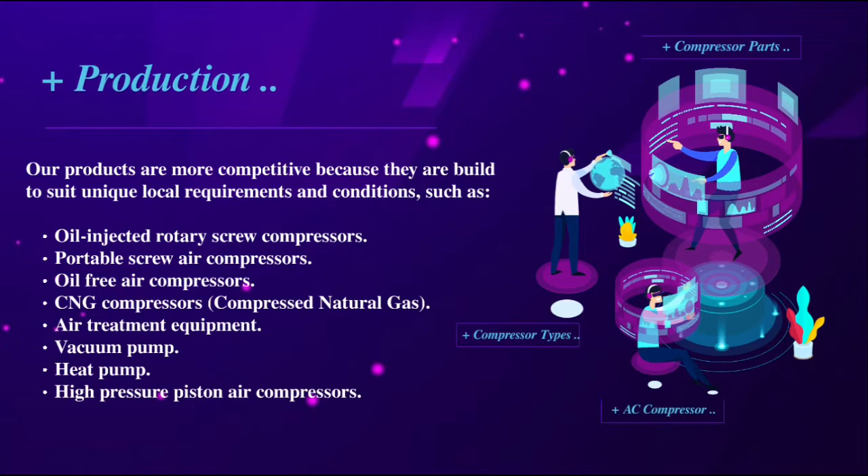Production: our products are more competitive because they are built to suit unique local requirements and conditions, such as oil-injected rotary screw, portable screw air compressors, oil-free air compressors, CNG compressors, air treatment equipment, vacuum and heat pump, and high-pressure piston air compressors. Compressor types: positive displacement, reciprocating, and rotary.

Reciprocating has single acting and double acting. Rotary has lobe, screw, and vane. The other type of compressors are dynamic, which includes centrifugal and axial.

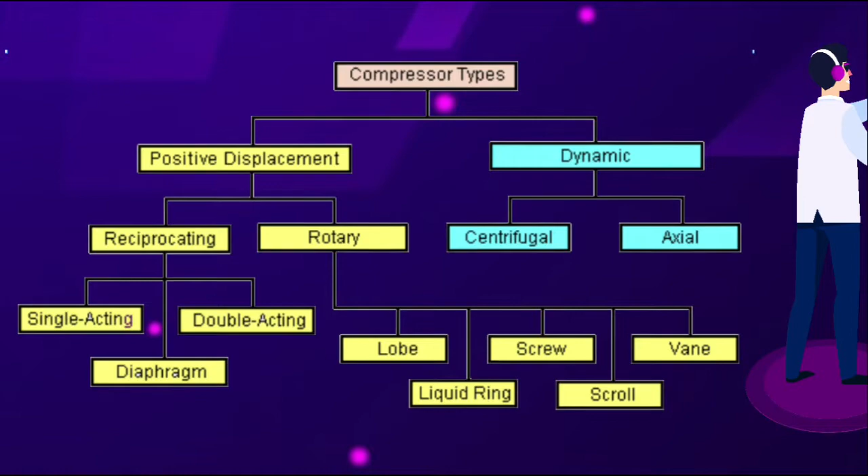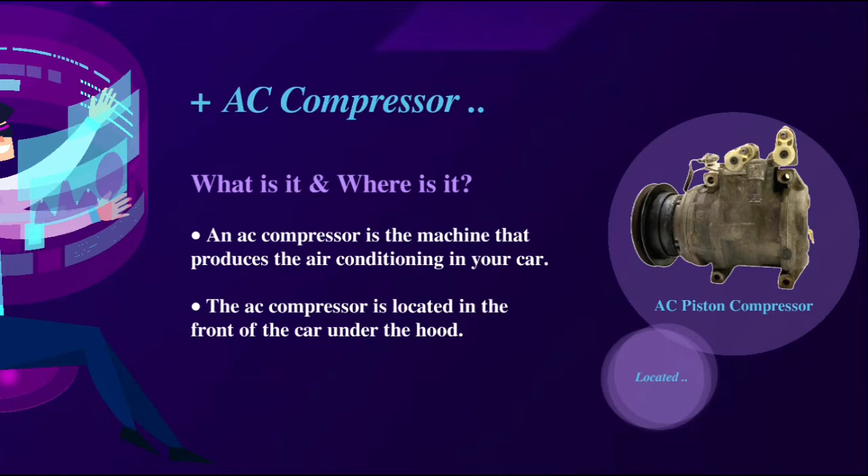AC compressor: what and where is it? An AC compressor is the machine that produces the air conditioning in your car. The AC compressor is located in the front of the car, under the hood.

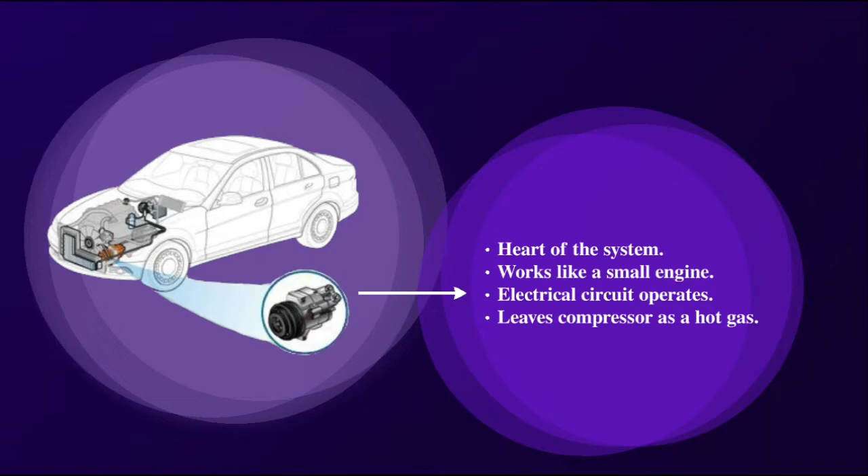AC piston compressor: the heart of the system. It works like a small engine. Operated by an electrical circuit, it leaves the compressor as a hot gas.

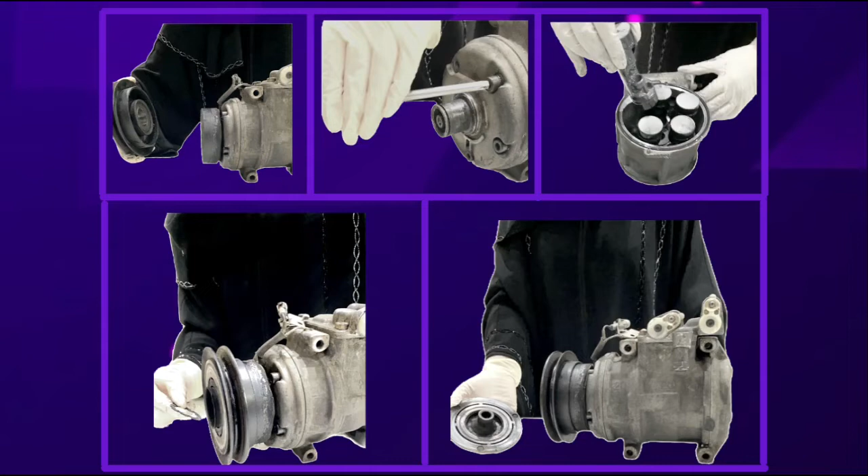AC compressor parts: we were able to remove the electromagnetic clutch. Then we removed the pulley using a hammer. Then we were able to remove the screws using screwdrivers. Then the pistons are shown in the last picture, and the next video would take you through it.

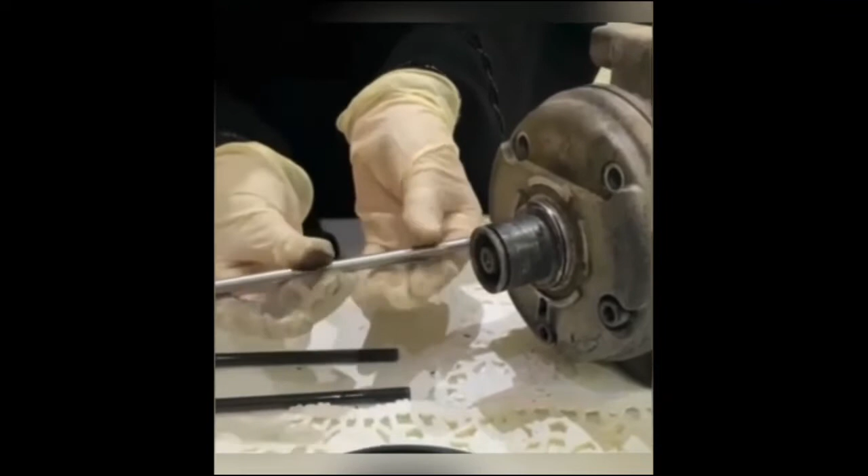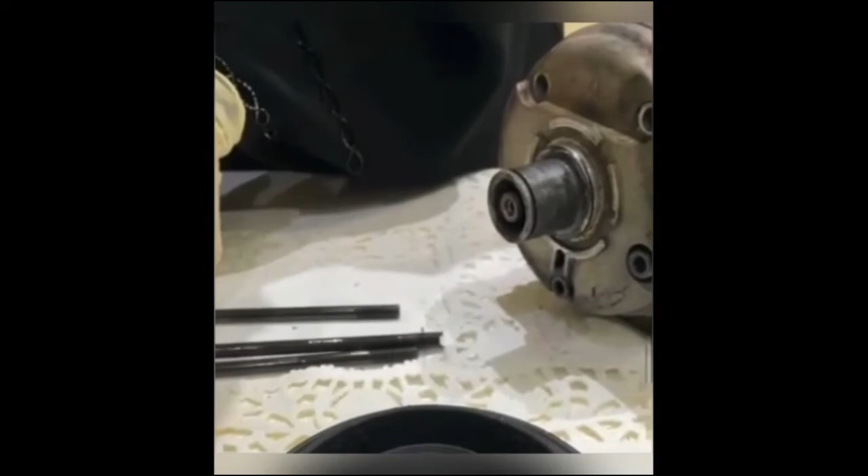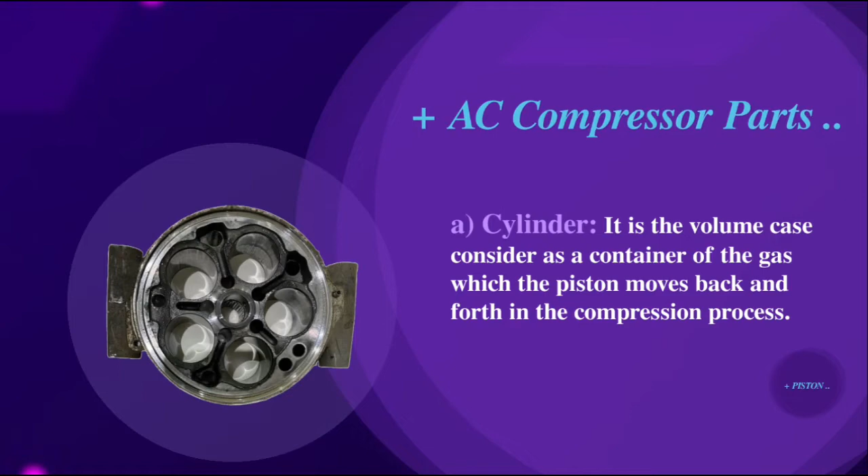AC compressor parts: cylinder. It is the volume case considered as a container of the gas, in which the piston moves back and forth during the compression process.

Piston: it moves forward and backward to suck and compress the gas. It pushes the gas into the discharge pipe during the compression stroke.

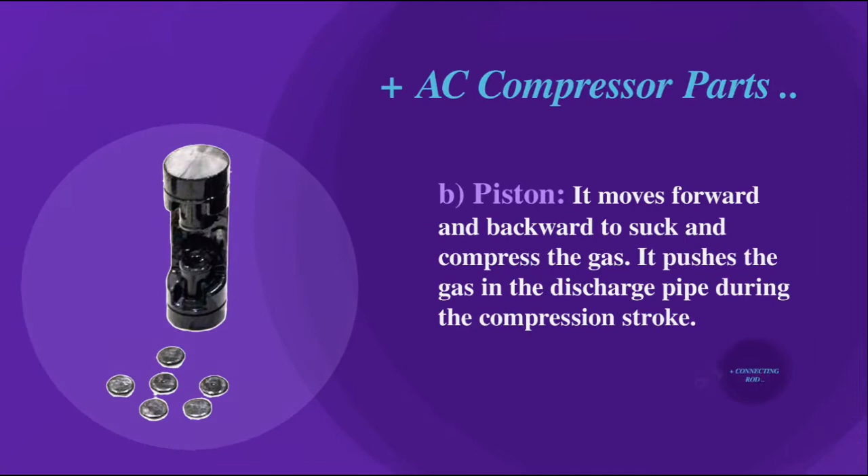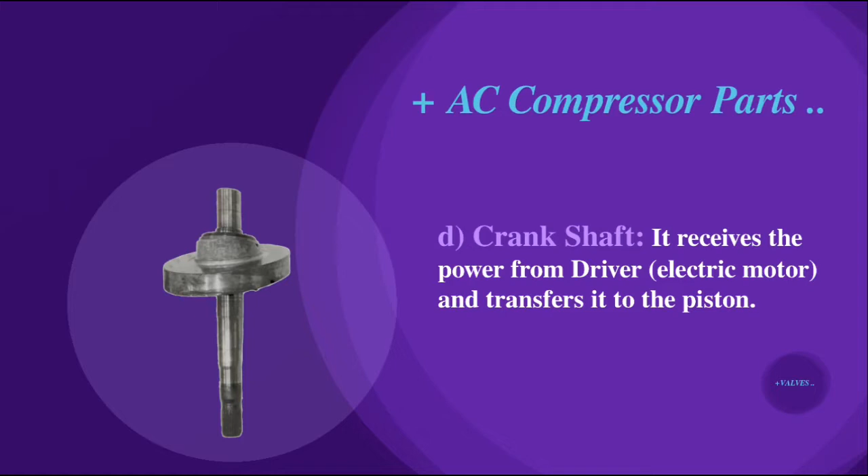Connecting rod: it connects the crankshaft with the piston rod. Crankshaft: it receives the power from the electric motor and transfers it to the piston.

Valves: two valves, suction and discharge valves, allow gas to enter the piston during suction and allow gas to go out in the discharge line during the compression stroke.

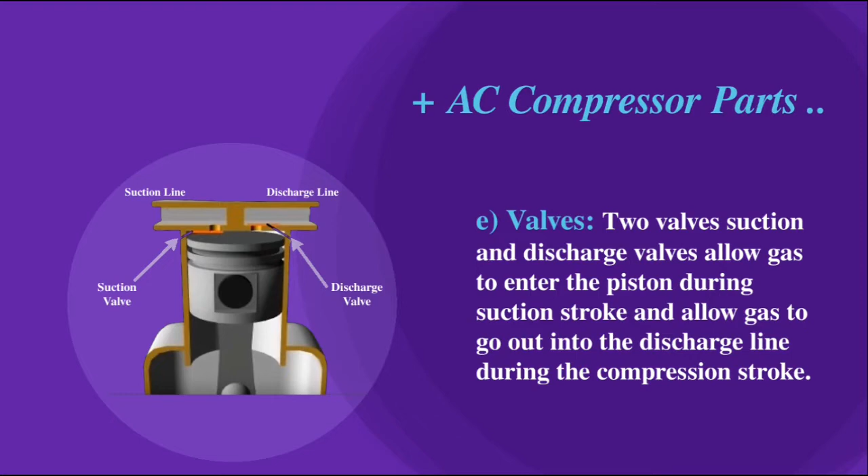Mechanism, the basics: all systems are the same, so transferring unwanted heat from inside and transporting it outside needs three things: two system types (orifice tube and expansion valve system), high pressure and low pressure, and four principles: compression, expansion, evaporation, and condensation.

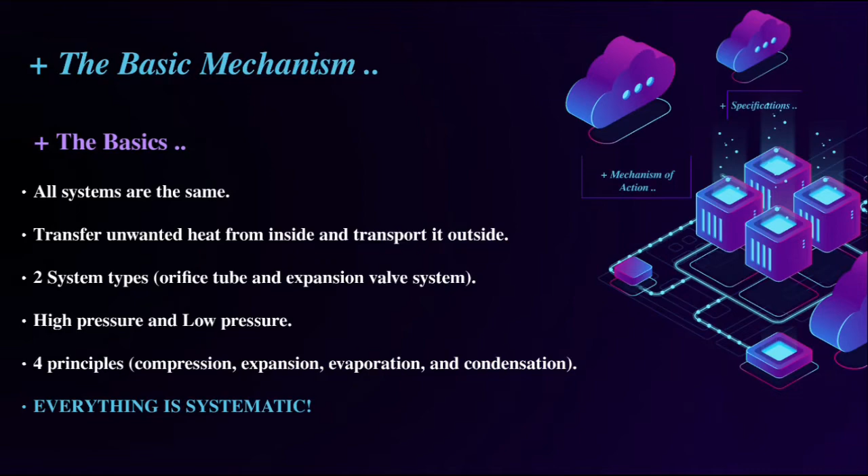Mechanism: the air conditioning process is used to create and maintain certain temperature, relative humidity, and air purity conditions in indoor spaces. It's also used in industrial applications to ensure correct operation of equipment or machinery that need to operate in a specific environmental condition.

Otherwise, to be able to carry out certain industrial processes such as drilling, which produce a huge amount of heat that needs to be disposed of in some manner.

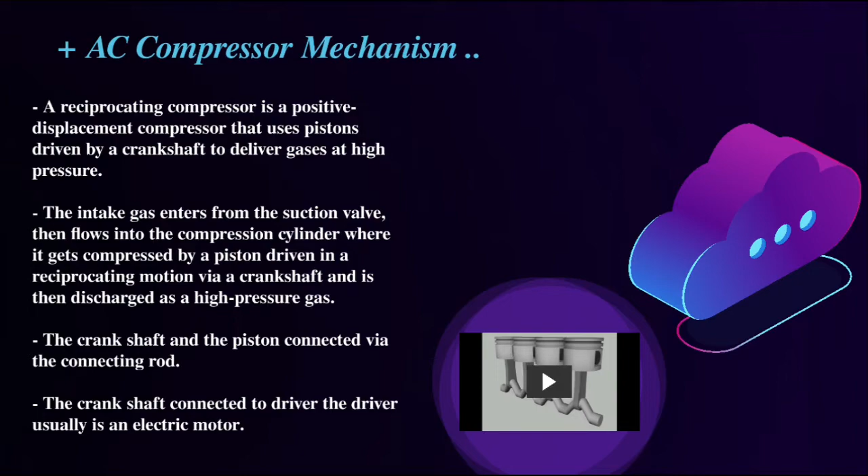In regions such as the Gulf that have high temperature and high humidity, AC is a must to exist in each house. The main process of air conditioning is to remove the heat and wetness from indoors, then reject it to the environment. This video will explain the mechanism of the AC compressor.

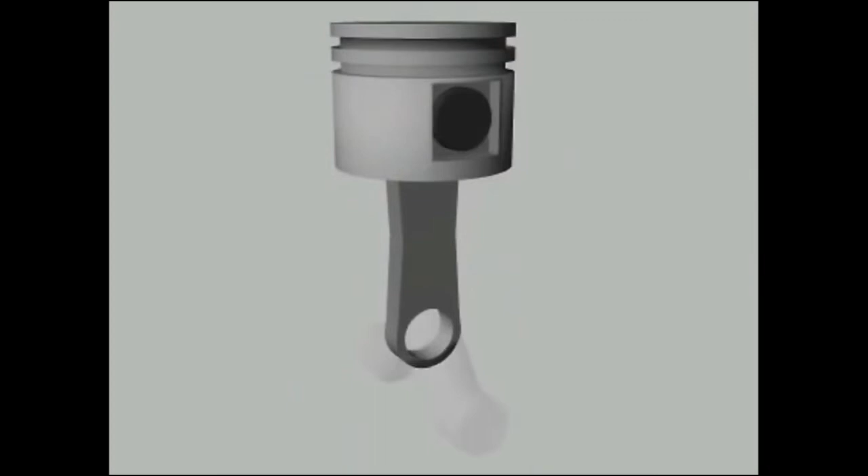A reciprocating compressor compresses refrigerant vapor in a cylinder using a piston. In a way, reciprocating compressors are like automobile engines. The pistons are directly driven through a wrist pin and connecting rod from a crankshaft.

Depending on their size, a reciprocating compressor may have one or more cylinders. Multiple cylinders may be arranged in line, opposed, or in a V. In each cylinder, a reciprocating compressor has both a suction valve and a discharge valve.

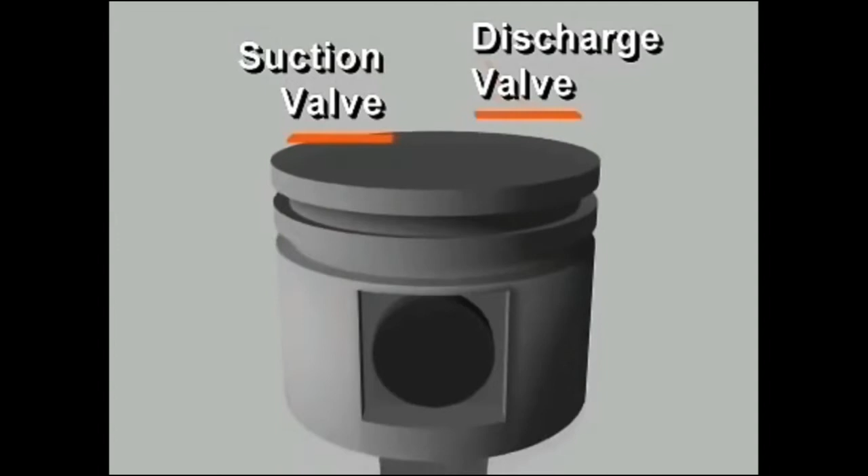These valves give the compressor its ability to pump refrigerant vapor against a pressure difference. They are usually located in the head of the cylinders, with passages connecting to the high or low pressure sides of the system. Let's follow the compression process in a single cylinder reciprocating compressor during one complete revolution of the crankshaft, starting with the piston at the top of the stroke, or top dead center.

The piston begins to move downwards as the crankshaft rotates. Because both valves are closed, the downward moving piston reduces the pressure in the cylinder. As the pressure in the cylinder falls below the low side pressure in the suction line, the pressure difference opens the suction valve, letting refrigerant vapor flow into the cylinder.

The piston continues down and pulls in more vapor until the cylinder is filled with low pressure vapor at the bottom of its stroke. Once past bottom dead center, the piston begins its upward stroke. The suction valve closes. As the piston moves up, it reduces the volume of the space in the cylinder, increasing the pressure of the vapor.

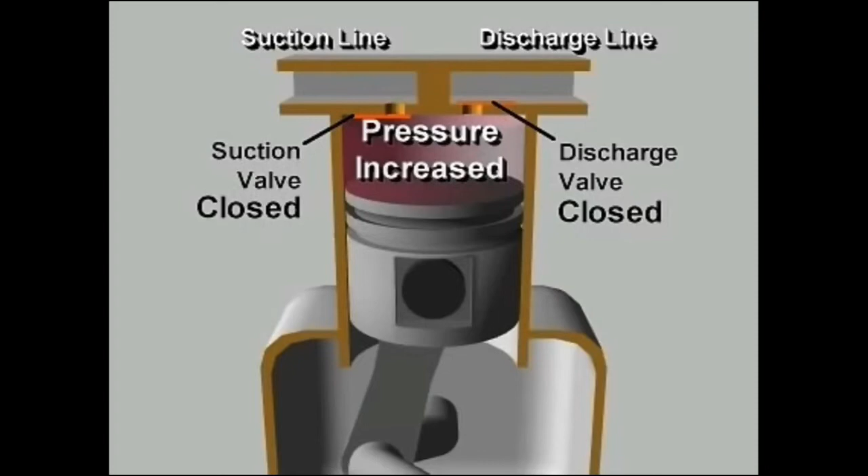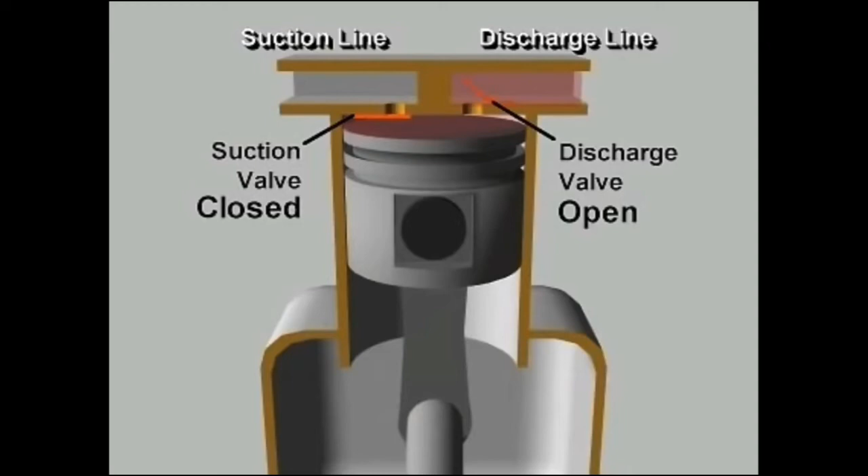When the pressure in the cylinder exceeds the high side pressure in the discharge line, the pressure difference pushes the discharge valve open, letting the compressed vapor flow out of the cylinder. This continues until the piston reaches the top of the stroke and most of the compressed vapor has been expelled into the discharge line. When the piston begins its downward stroke, the discharge valve closes.

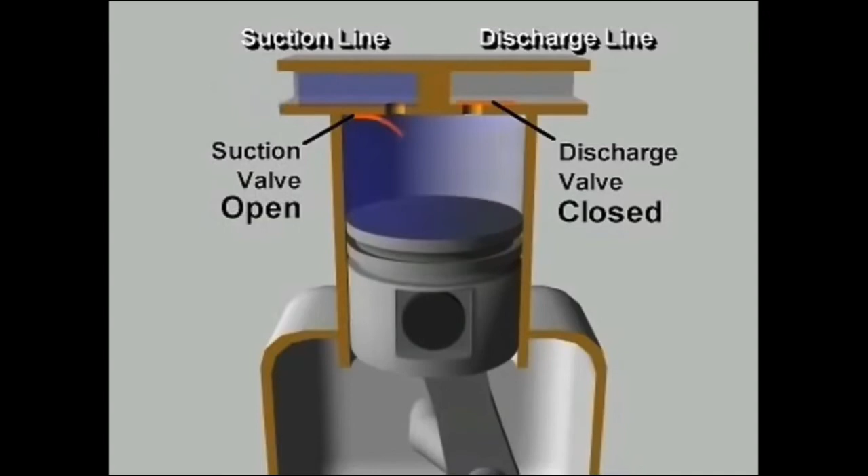The complete cycle then repeats during each revolution of the crankshaft. This is the mechanical positive displacement vapor compression cycle using a reciprocating compressor.

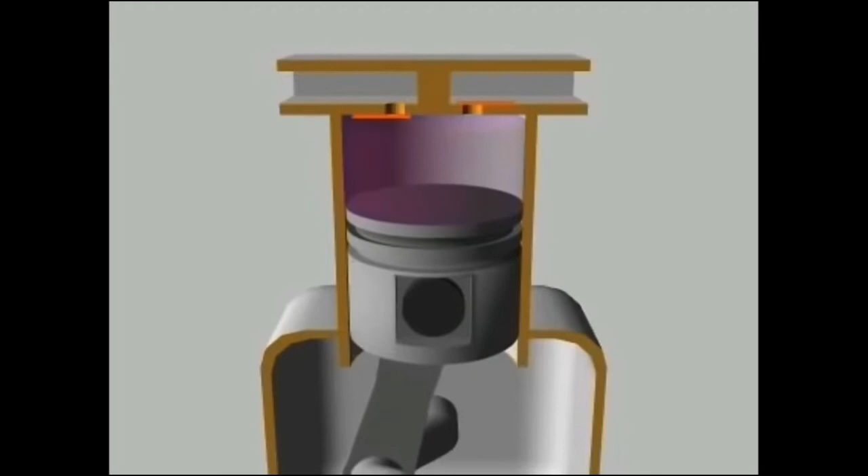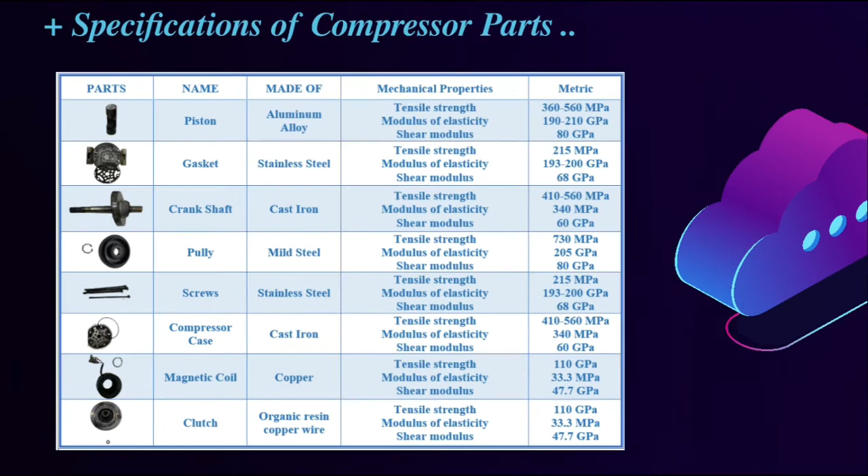Specification. This table contains the names of the compressor parts, the materials they are made of, and the mechanical properties that must be durable with a high yield strength to prevent both external and internal damage.

Tensile strength is the maximum load that a material can support without fracture when being stretched, divided by the original cross-sectional area of the material.

The second property is modulus of elasticity, which is a measure of an object's resistance to being deformed elastically. When stress is applied, we can define it as the slope of its stress-strain curve in the elastic deformation region.

The last one is shear modulus, which is the ratio of the shear stress to shear strain, and it is also known as the modulus of rigidity.

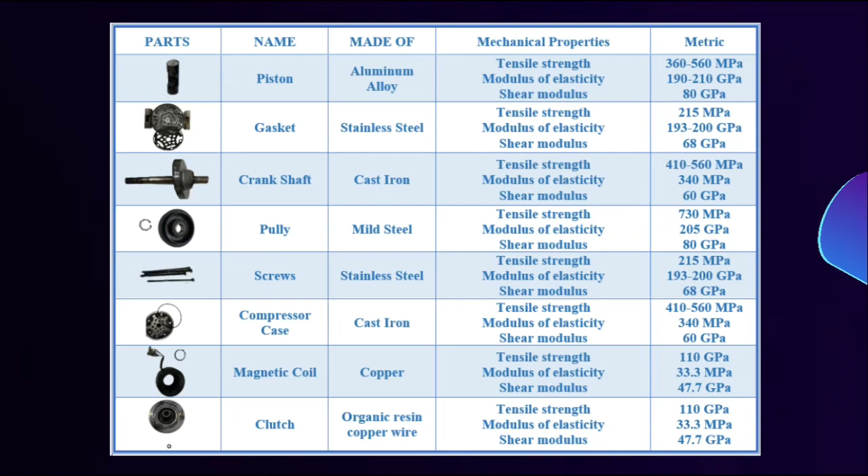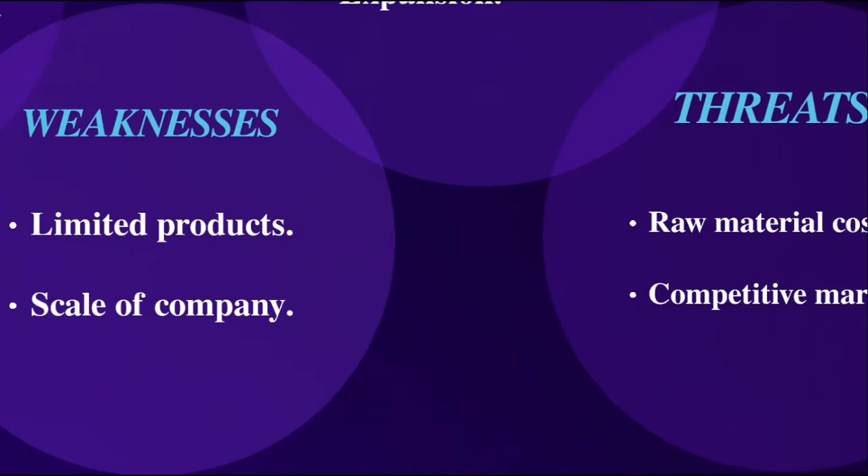Weakness: limited products, scale of company. Threats: raw material cost, competitive market.

Damages. There are a lot of damages that cause the AC compressor to fail. The first one is corrosion. Corrosion results in failure and it's responsible for about 40% of equipment failures in industrial applications.

Overheating: when dust and mineral scales build up on the condenser coil, the air conditioner cannot expel enough heat from the system and it's forced to run constantly trying to cool your space. Less field maintenance: an air conditioner's filters, coils and fans require regular maintenance for the unit to function.

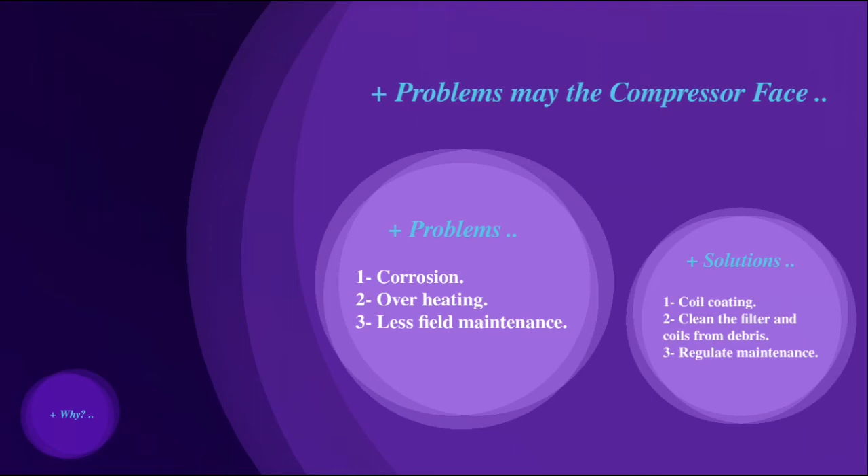Solutions. Here are some solutions to stay away from the previous problems. The first one is coil coating, like coating your coils with a material that is anti-corrosion. Clean the filter and coils from dust and germs. Regulate maintenance so the AC compressor could function effectively.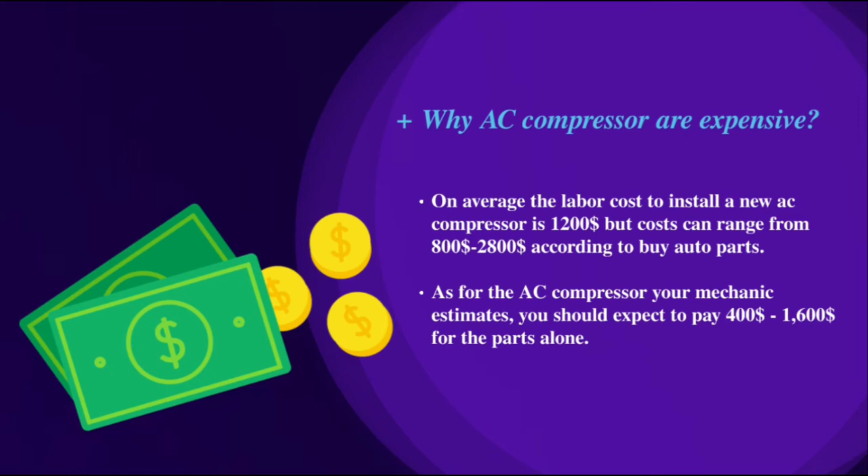Why are AC compressors expensive? On average, the labor cost to install a new AC compressor is $1,200, but costs can range from $800 to $2,800 according to Buy Auto Parts. As for the AC compressor itself, your mechanic estimates you should expect to pay $400 to $1,600 for the parts only, and the price may change from one supplier to another.

Our services. 3A's Qatar Compressor Company built the operating system to provide warehousing, freight, reverse logistics, and technology services that enable our customers to transact with us at the lowest cost.

Our app is useful for many reasons. It allows customers to contact, view, buy, and give us their feedback about our products. The other reason is 3A's app can help them maintain their air compressors, so they must read and follow our app instructions.

Delivery. In door-to-door delivery services, customers can book directly through the app using the online order form. You choose a service, select your location, pick a date and time, and then choose the service provider.

After that, you can sit back and relax because 3A's QCC app promises that all services will be fulfilled and that customers are satisfied. With 3A's QCC delivery, our service reaches you wherever you are.

Hopefully me and my company mates were able to give you brief and clear information about the reciprocating piston compressor, which is used in car ACs. This is one type of compressor we can provide.